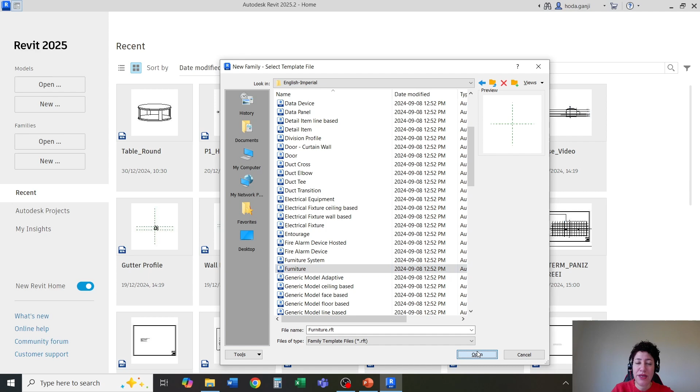Hit open. In order to create the four type options, I'm going to create a parameter for diameter and a parameter for height. Let's go with the first option, which is 42.5 for diameter, 16 inches, and these are the overall dimensions.

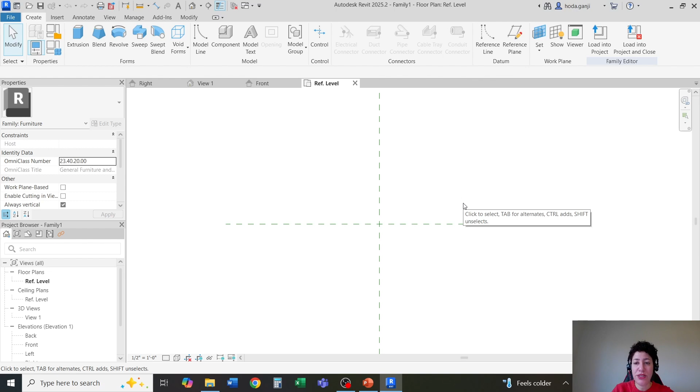So I'm going to go with the units, UN. I'm going to change the length to be in inches, and I'll go with 3 decimal places, and maybe I'll use the unit symbol for inches.

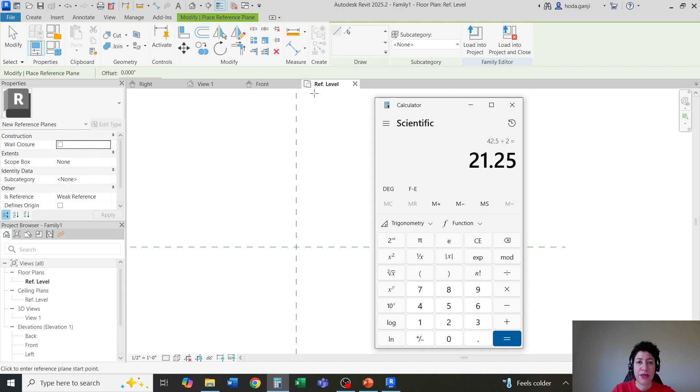OK and OK. I'm going to use a reference plane, type RP for reference plane. I'm going to put half of 42.5 on one side and the other half on the other side. So I'll go with 21.25 on one side, the other side, also for the other direction.

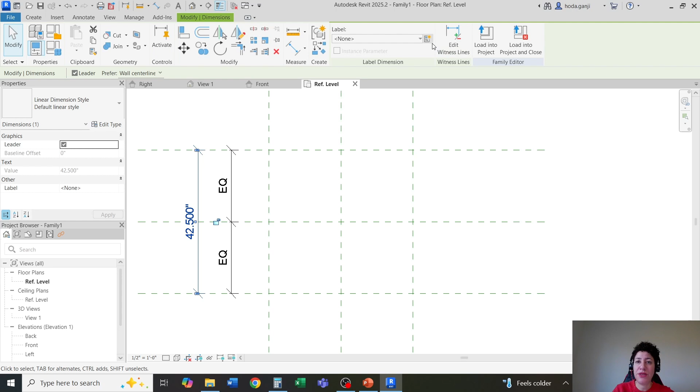I'm going to get the dimensions here, DI. This one is going to be equal. I'll get the overall dimension here, hit escape, select this, and this is what's going to be the diameter. So I'm going to create a parameter for this dimension, and I'm going to call it the diameter.

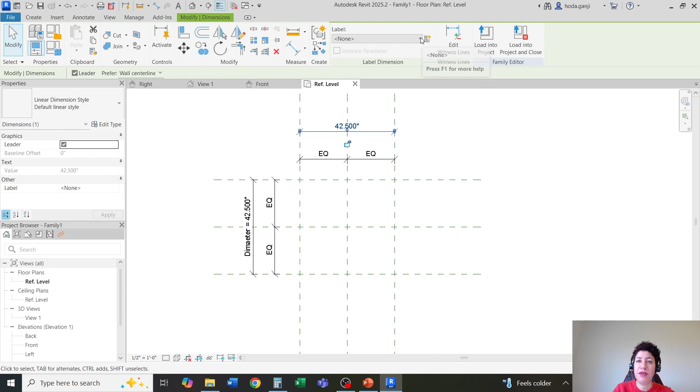As a type is good, OK. I'm going to type DI for dimension here, here, and here. It's going to be equal again. And the overall, when you get it, hit escape, select this from the label menu, go with diameter.

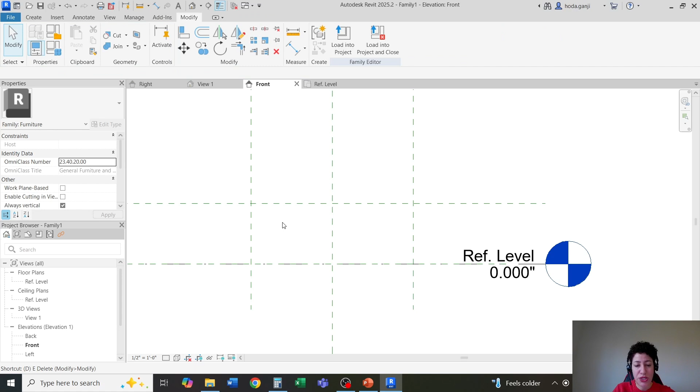There we go. On the front view, I'm going to create another reference plane, RP. Pick this line, offset by 16 inches. Up here, escape, DI dimension, and hit escape again, select this.

This one is going to be a new parameter. I'm going to call it the height, and OK.

Let's go back to the reference level. One little thing here, if you notice, is that the top shelf, the wood part, is a little bit inside because we're going to need some room for the legs. So I'm going to draw a circle extrusion, but I'm going to have 42 for diameter for the top shelf, so it's going to be 1/4 of an inch on each side for the thickness of the legs.

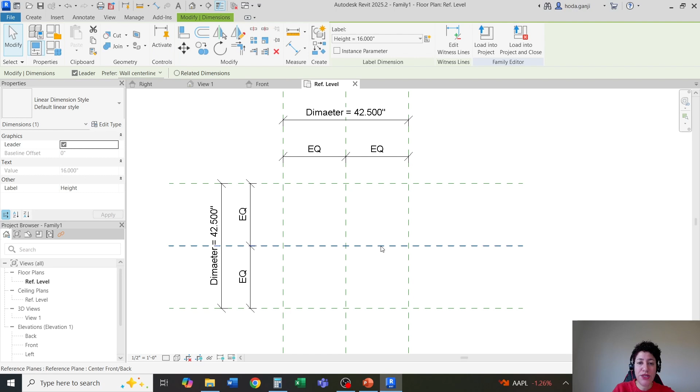So let's go back to Revit. I'm going to go to the front view. I'm going to select this reference plane, hit escape, go with create, set, pick a plane, pick this one, go to the reference level, and here I'm going to draw an extrusion.

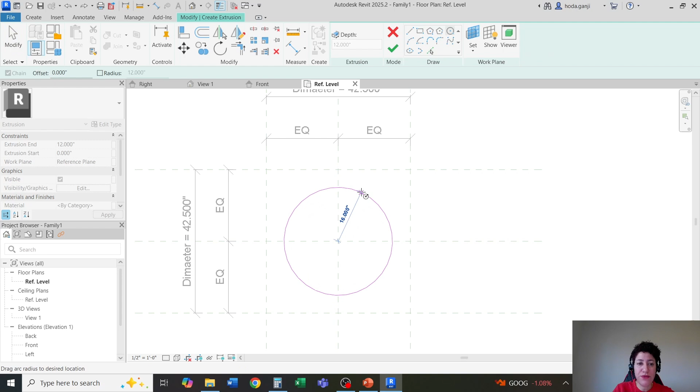Select the circle, one click here, 42 divided by 2 is going to be 21 in radius. So that 1/4 of an inch is going to be left over there for the thickness of the leg, but it's going to be always half an inch less than the diameter.

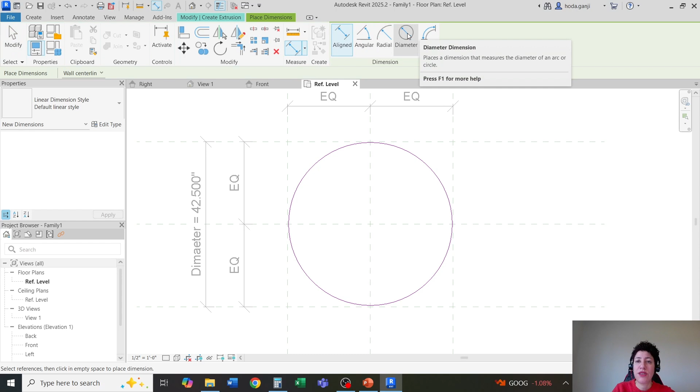So what I'm going to do is go with DI. I'm going to get this diameter dimension for this top circle, hit escape, select this, and this is also going to be a parameter, and I'm going to name it the diameter underscore shelf. Hit OK.

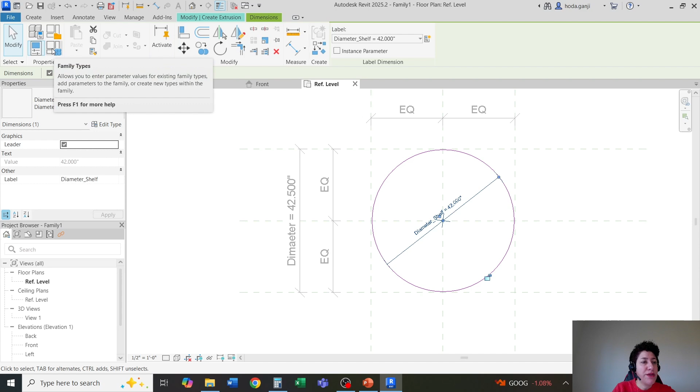Then I'm going to go to my family types, and I'm going to say for the diameter of the shelf, always go with diameter minus half an inch, 1/4 inches on each side. Hit OK.

Diameter, I might have a typo here. So first I need to get rid of this, go here. Click on it, go with edit. I'm going to type it again.

Okay, now that there is no typo, I'm going to type diameter, excuse me, diameter minus half an inch in here. Hit apply. Now it's all good.

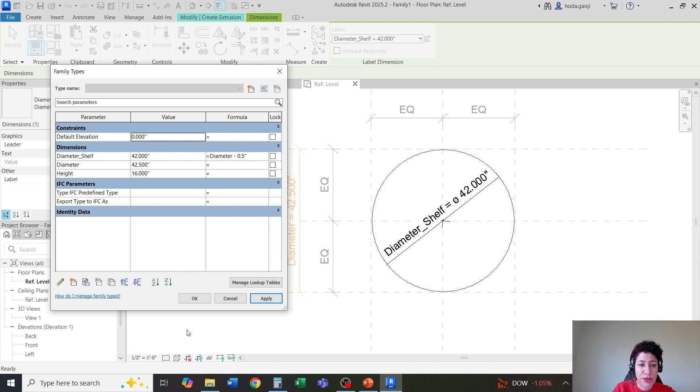Okay, and finish this extrusion. On the front side, we know that it's 1 inch going down, so for extrusion end, I'm going to go with -1.

Okay, now we can try our table. So I'm going to see if I go with, let's say 50 inches, this circle, the top shelf is responding. I'll go back, it's 42 and a half, it's all working okay, okay, okay, and okay.

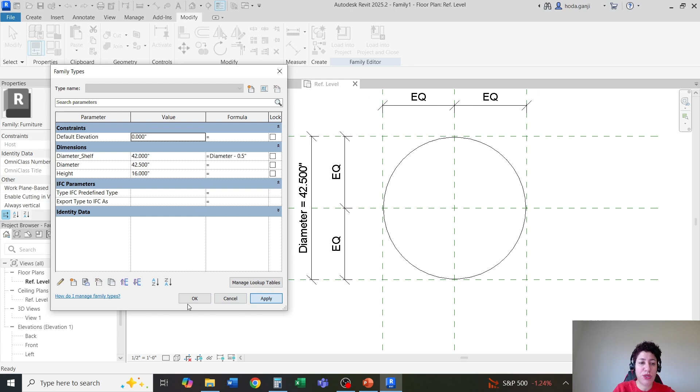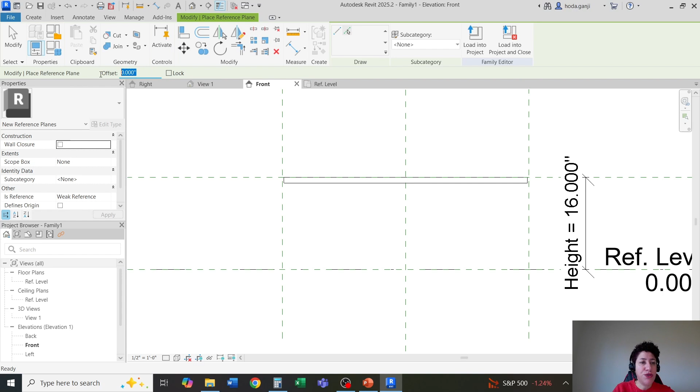To the front view, we also have 1 inch of the leg, the black part, then 1 inch above that, which is a second shelf. So I'll go here, I'm going to go with RP, reference plane, pick line, 1 inch for offset, and I'm going to offset 1 inch above here, hit DI, get this dimension and lock it.

So it's always going to be 1 inch locked to the bottom. And as you see, it's going to start from 1 inch going up by 1 inch.

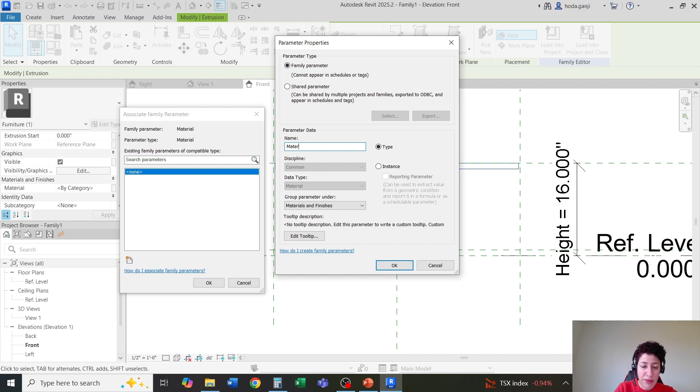Before going on, I'm going to select this. To the material, I'm going to assign a parameter. I'll click on Associate Family Parameter, click on New, and this is going to be material for the top, which is a wood. OK and OK.

Then I'm going to select this. I'm going to copy to clipboard, and paste to same place, so it's copied on itself. Now I'll go with edit work plane, pick a plane, I'll pick this one.

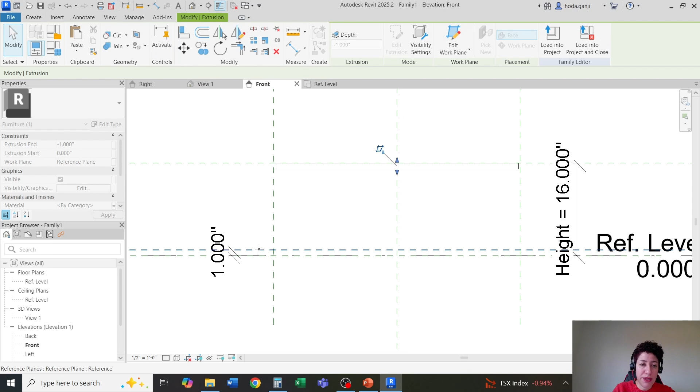So the copied one goes here, and the only difference is that the extrusion end is going to be +1 instead of -1. So these are the two shelves.

Feel free to try it. Try the parameter. So if I go here, I say go with 50, both of them respond, that's good. I'll go with 42 and a half. Also, if you change the height, the top one should respond, which it does. So it's all good so far.

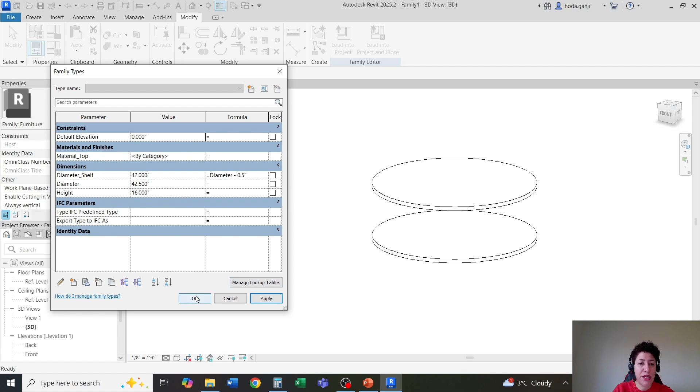Okay, I'll go to the front view. I'm going to close the ceiling plan so there would be no confusion. We always use the reference level for floor plan. I'm going to have front view here.

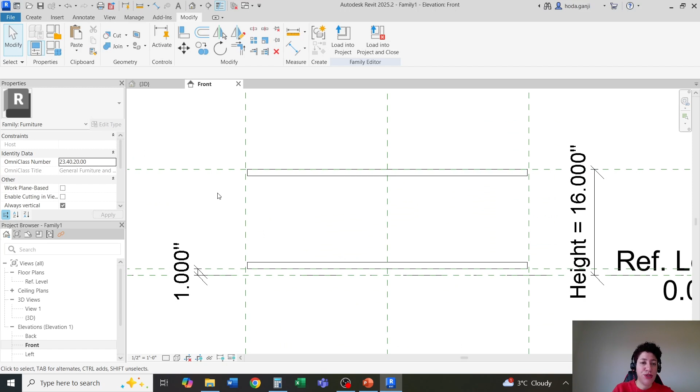Next, maybe I can create the leg at the bottom, and we're going to have one at the top too, a 1 inch offset from the top, from the height. So I need another reference plane here, RP. I'm going to offset it by 1 inch. One click here, hit escape, DI, get this dimension and lock it.

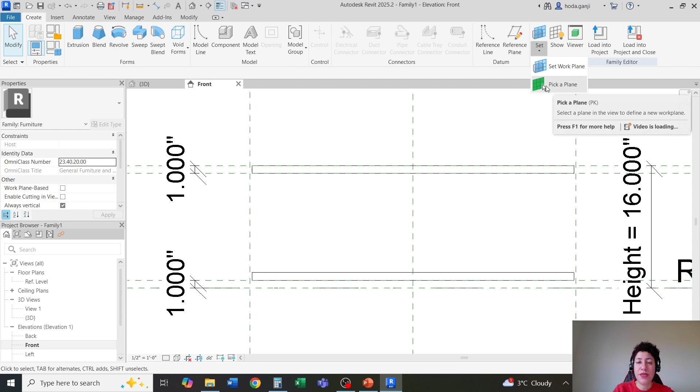Next, maybe I'll go to this reference plane and draw my circular supporting here. So I'm going to go with create, set, pick a plane. I'll pick this plane, I'll go to reference level. Another extrusion, this time it's going to go all the way to the outside here.

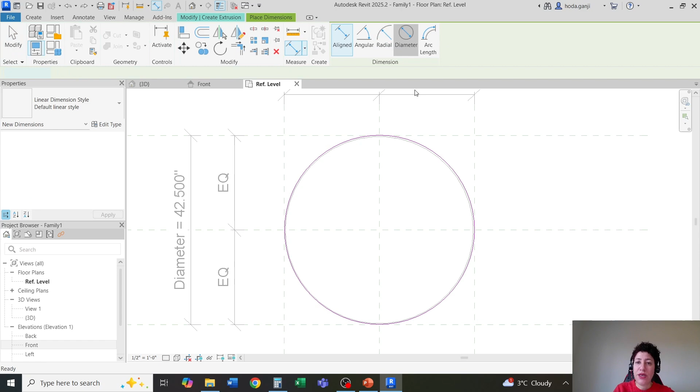Now, in order for this circle to respond to this diameter, I need to type DI, get this diameter, the one on the outside here. Hit escape, select this, and I'm going to say for this one, follow the diameter itself. Finish this. And now let's go here, click on it, and it's going to be -1 for the extrusion.

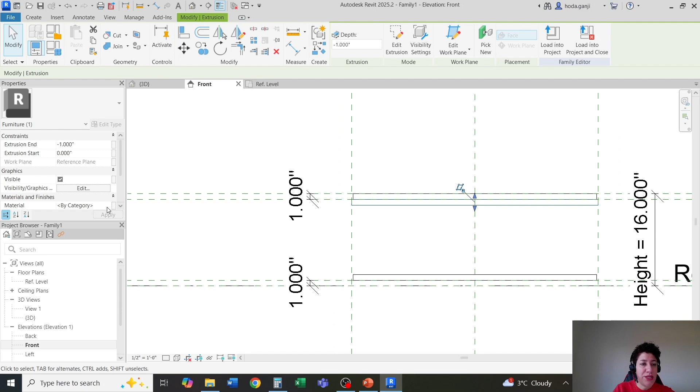To the material for this one, I'm going to go with associate family parameter. It's going to be a new parameter, which I'm going to call material for the leg and support. So now let's check it.

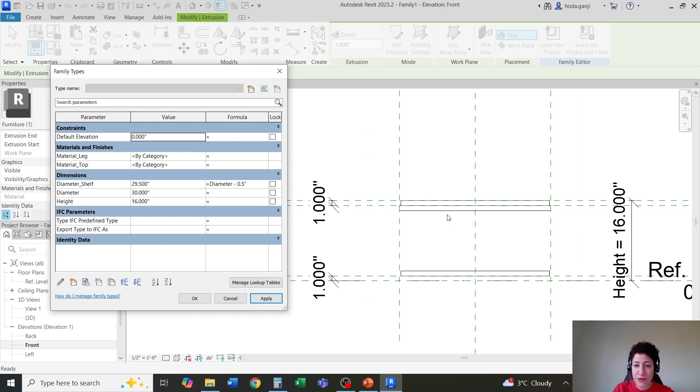If I change the diameter, let's say to 30, both of them respond, that's good. I'll go back to 42 and a half, apply and OK.

I'm going to select this one and copy, paste to the same place. Edit work plane, pick a plane. I'm going to move it down here and change extrusion end to 1. Hit apply. So far it seems all good.

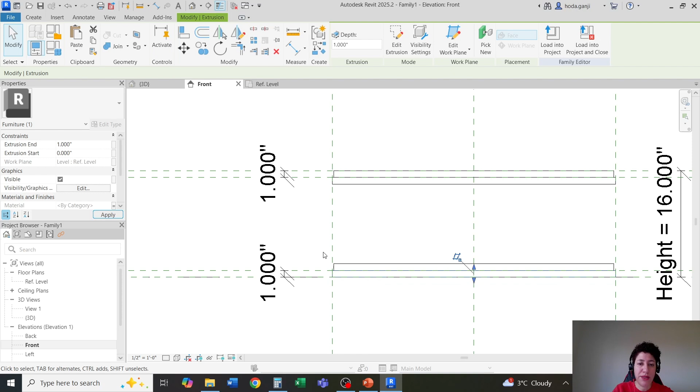We have the 4 circular parts. Next, I need to create the 4 legs. It's 4¼ of an inch by 12 inches. It's actually by 13 inches. I think it's a small mistake here. But it's actually aligned with the edge of the circle. It's not totally rectangular, right? So it's 4¼, right? So first thing I want to do here is on reference level.

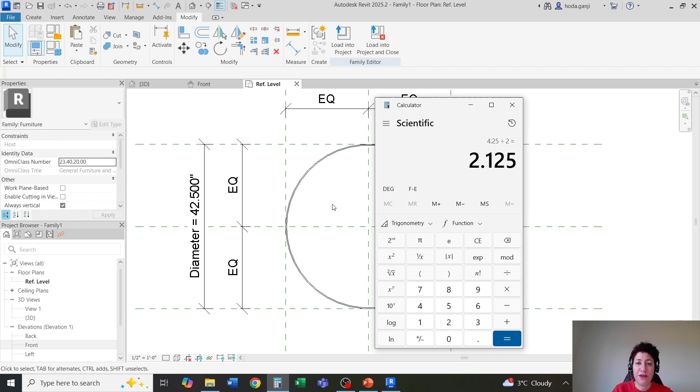4.25 by 2 is going to be 2.125. I'm going to go with reference planes offset by 2.125 from the center one to right and left, and right and left here, hit escape. Now get dimension, DI from here to here and here, it's going to be equal, and here to here it should be 4.25. That's good.

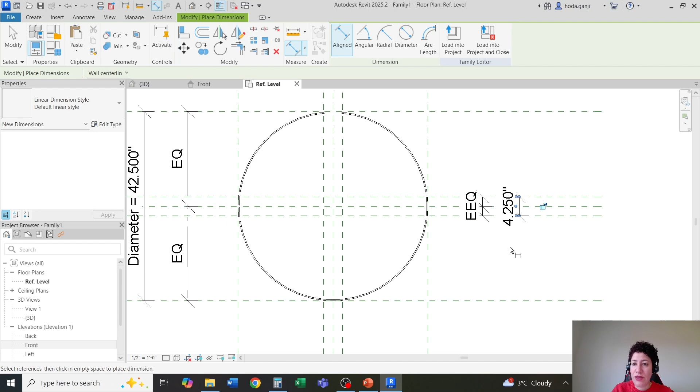Same here. Get the dimension, it's going to be equal dimension on this edge, and from here to here is 4.25, right? Now I'm going to go to front view.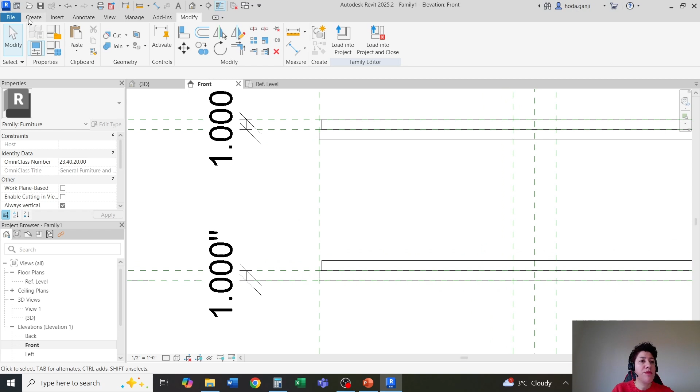The leg is going to start on this reference plane, 1 inch above the floor. So I'm going to go with create, set, pick a plane, pick this one, go to reference level. I'm going to go with an extrusion.

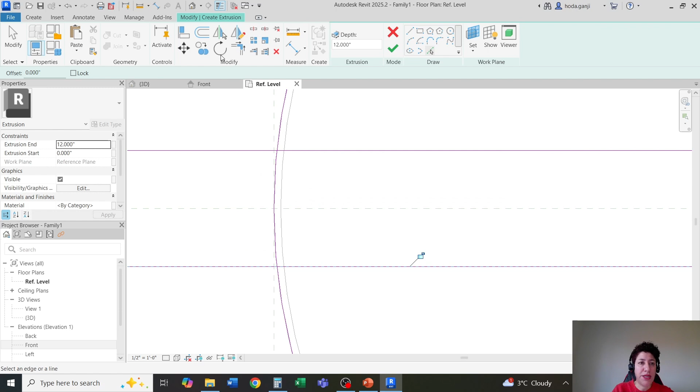Now I'm going to pick this line, lock it, this line, lock it, so it's going to be locked to the edge. I'm going to pick these two reference planes, and I'm going to trim this part, trim here, trim here. Then I want to pick this line, lock it, this line, lock it, and trim here and here. Okay, I'm going to finish this.

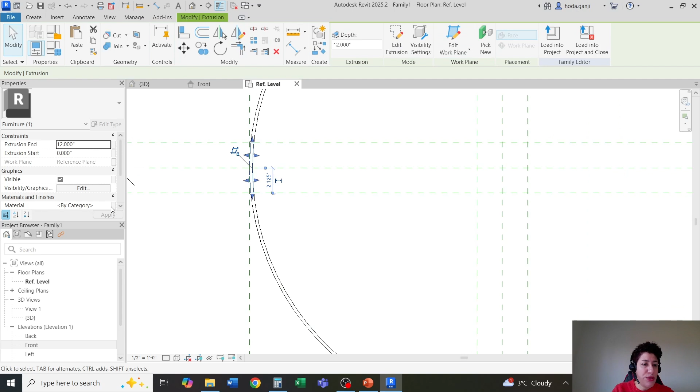To the material, I can go with associate family parameter, select the material of the leg that we already created, hit OK. On the front view, I'm going to move this up and lock it to the bottom of the top circular part, like this. Okay, now if I look at it...

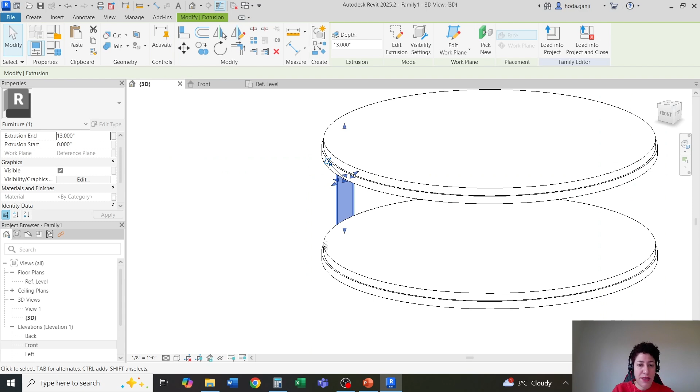If I go here and change, let's say the diameter to 28 inches, it's gonna follow, it's all good. I'll go with 42.5.

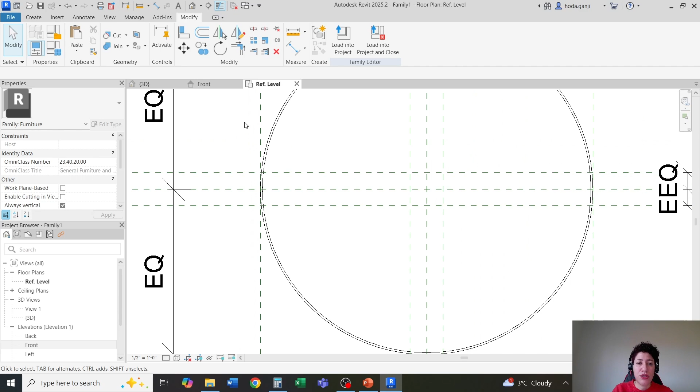Last thing I need to do is to have this leg on the other three sides. So I'm gonna go here, select that leg, go with edit extrusion, select this extrusion, and say mirror. It's gonna be mirrored on that side.

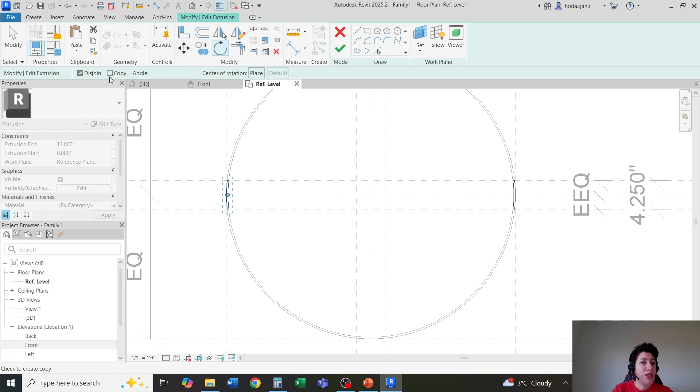I want to select it again and say copy or rotate, and where you are rotating, also copy that. I'm going to place the center here, rotate by 90 degrees. Finally hit escape, select this and mirror on this other side.

Finish this extrusion. I'm gonna look at it on this view. Now, if I go with a different diameter, let's say 30, it all follows, that's good. And it's gonna keep being 4.25 on the width for the leg, that's good. I'll go with 42.5 here, apply and OK.

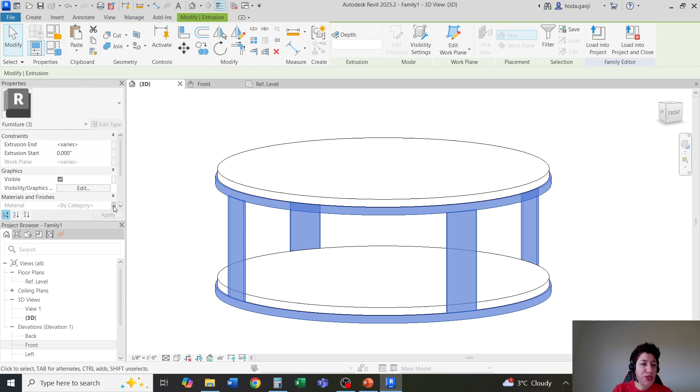So it's all nice and good now. See that we have only two materials: one material for these three objects, which is the material of the leg, and one material for these two, which is the material for the top or for the shelf.

Next thing I need to do is create four type options. The first one is 42.5 by 16. So I'm going to go here and go with new type. I'm going to call it 42.5 by 16. It's 42.5 by 16, that's good. Apply it. I'll go with a new one.

Second type is going to be 30 inches by 16. It's a bit smaller, so 30 by 16. I'm going to put the diameter on 30. That remains 16 for the height. Apply, OK. I'll go back to my family types.

So far I have two options. I'm going to create a third one, which is smaller and higher, like in the corner between the sofas. It's going to be 24 by 24. Diameter is 24, height is also 24. Hit apply.

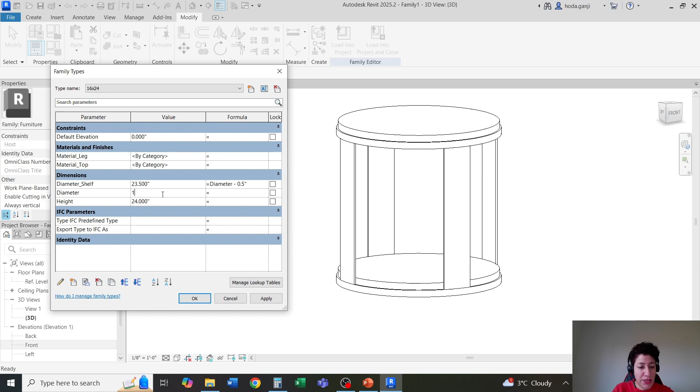This another one, hit apply. A new type, and this last one is going to be 12 actually. Maybe we'll go with 16, 12 is too small. 16 by 24. I'm going to type 16 by 24. Diameter is going to be 16. Height is remaining 24. Apply and OK.

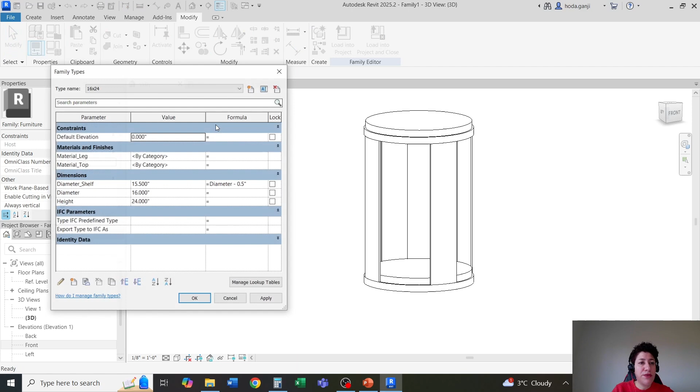So this is my type 1. This is my type 2. This is my type 3. And this is my type 4, all in one family. I'll go with type 1, that's the main one in this case.

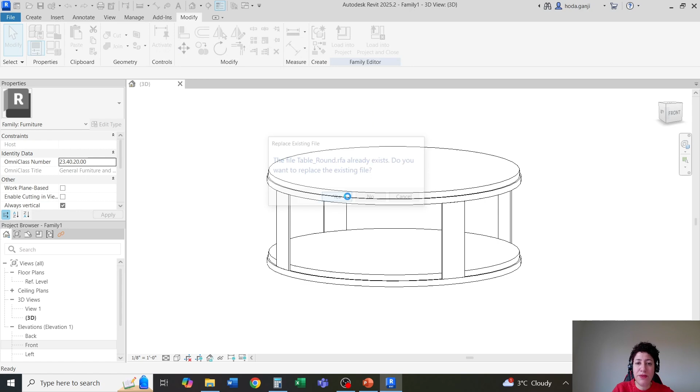Now I'm going to save this family and load it into the project, and I'll show you how to assign material. So save the family. I'm going to name this round table. One option, I'll go with one option as backup. Save it, I'll replace it with what I have. Then I'm going to open a new project.

So I'll go with new model. It doesn't matter if this project is metric or imperial. I might go with metric, open, OK. The units don't matter. I'm going to load this into the project and close.

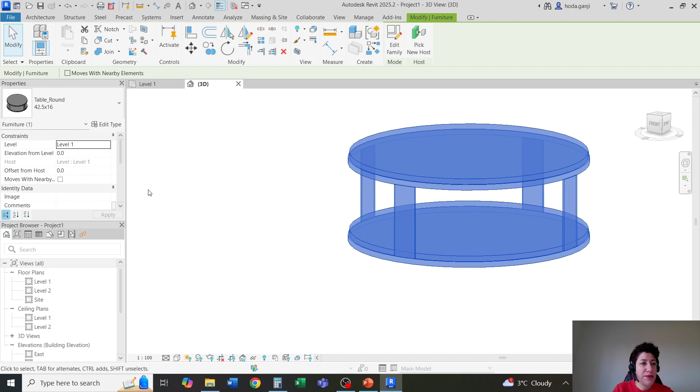Put one of them here. Let's look at it here. And this one is a round table. If I go here, you see all the options are here, right? So maybe I'll have this one.

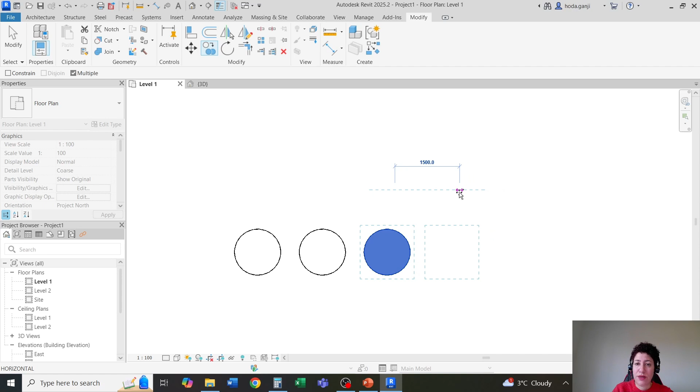I'm going to copy this four times here: 1, 2, 3, and 4. First one is going to be type 1. Second one, I'll put it on type 2, type 3, and type 4, just so we see. Type 4.

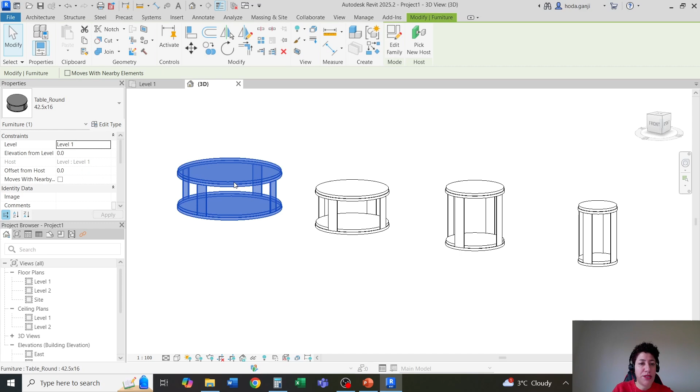There we go. So now one last thing I want to do is assign material. I'm going to click on this one, edit. I'm going to click here to assign a material. I'm going to create a new material, rename it. This is going to be called Biscotti Wood.

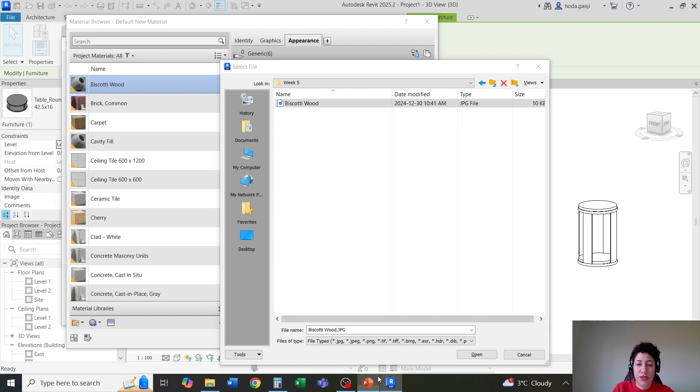On the appearance, I'm going to go with an image, and this is the wood panel that you see here. I'm going to select it. Under graphics, I'll say go with using the render appearance, so it's going to have more or less the same color. Feel free to go with edit image here.

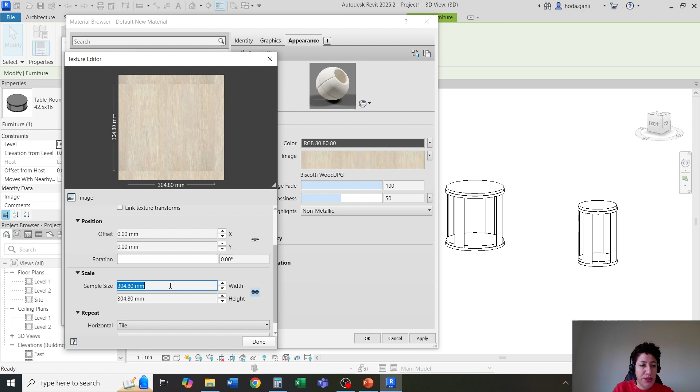You can set the sample size that I have, which is 1 foot by 1 foot, or you can set the sample to 2 foot by 2 foot. Done, OK and OK. I'm going to put this on realistic. Now you see it applied it on this one. I actually need to go one by one.

And now that I have the material, I can just go ahead and assign it. Next one, assign the same material.

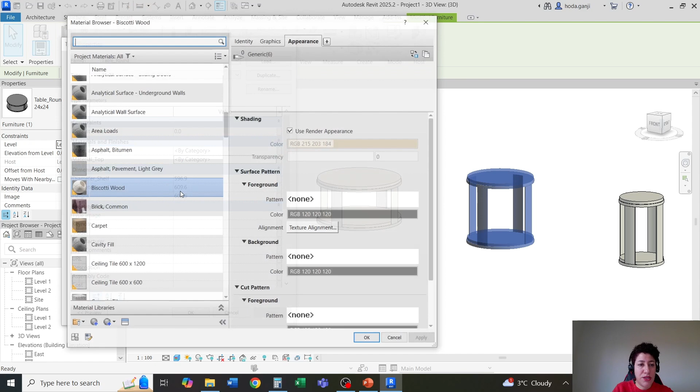And the last one, assign the same material. OK and OK.

Now select this and go to the type for the material of the leg. I'm going to create a new material. I'm going to name it table leg.

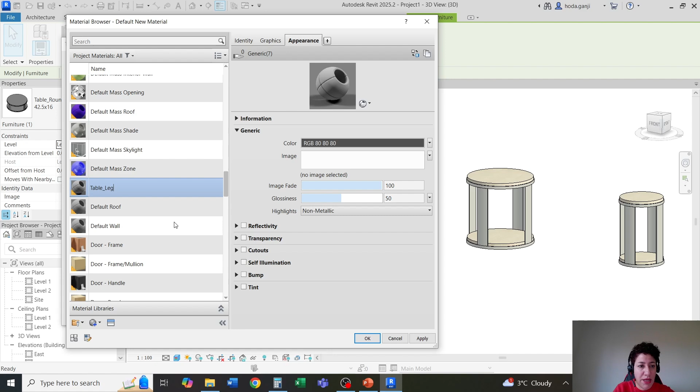Under appearance, this time I'm just going to assign a color. But what color is it? Let me show a trick. If you don't know a color of something, go with insert in PowerPoint. If you don't have Photoshop, you can just draw any image here. For the shape fill, I'm going to go with eyedropper and click here somewhere.

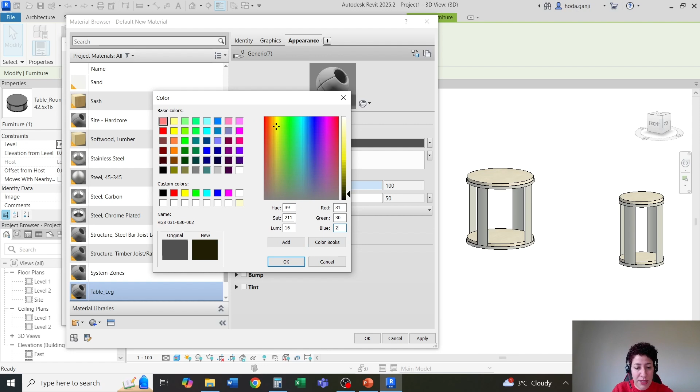Again, I use this option. Now that I have it, I'll go with eyedropper and click somewhere on the leg. I'll go with shape fill, more fill colors, and it's 31, 30, 28 for RGB. So I'll go here for the color, I'll go with 31, 30, 28, and you get the exact same color. Hit OK. For graphic again, I'll go with use same color, which is 31, 30, 28. Hit OK, hit OK. I can assign material of the leg to this one.

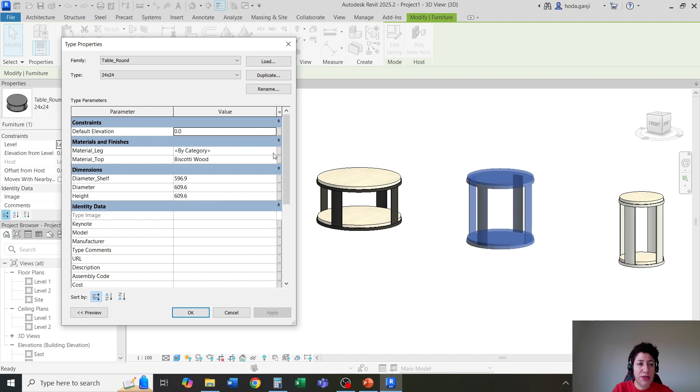I can assign material of the leg to this one too, and finally to this one.

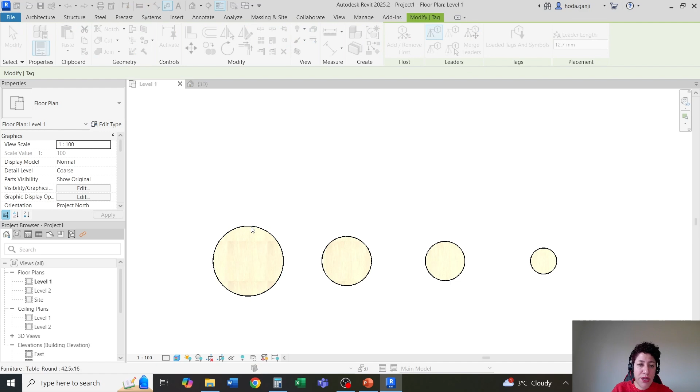Okay, now if I see this on level 1, you can also put it on realistic here if you want. I can also tag them, so I'm going to go with annotate, tag by category, tag this one. I'm going to need a tag for furniture, yes.

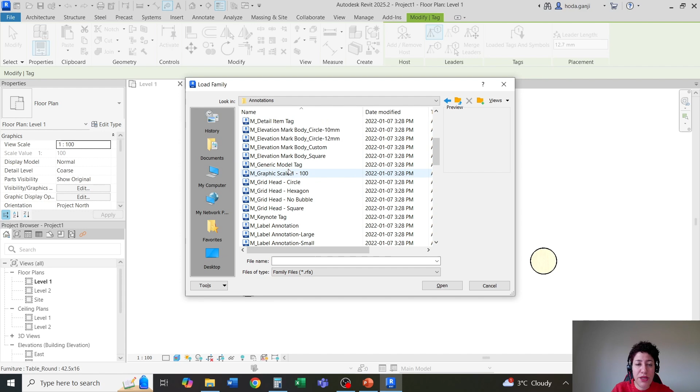The tags are always under annotations, so I'm going to go with annotations. I'll go one step back. I'll go with English US annotations. It's going to be a furniture tag. If you don't find it here, go to the architectural menu and metric furniture tag. OK.

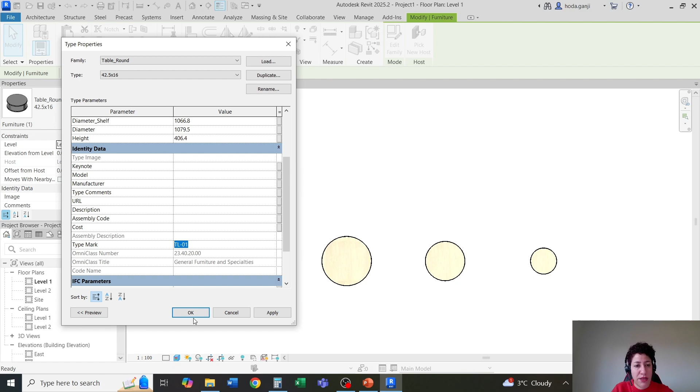One click here. And what is the tag reading? It's basically reading the edit type. So I'm going to go here and let's say I'll go with type mark. I'm going to call this maybe TL01, table number 1. Feel free to select this tag, edit family.

Sometimes I would like to maybe put these lines as invisible, load into project and override so I don't see the line. I'm gonna go with tag again. TG is for tag. I'll tag this one, and this one.

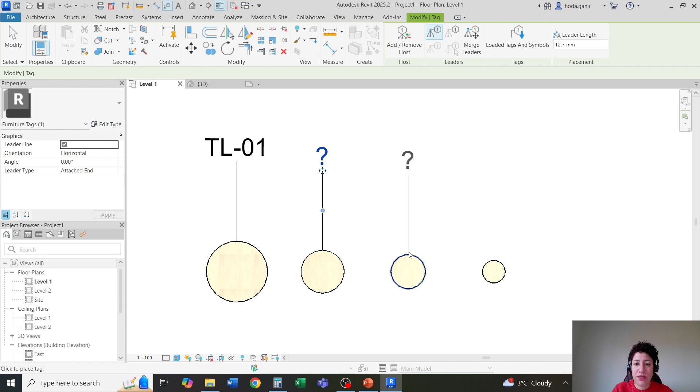Again, what is it reading here in the tag? It's reading the type mark. You can change it to mark if you want. What's the difference here? Mark is the value here.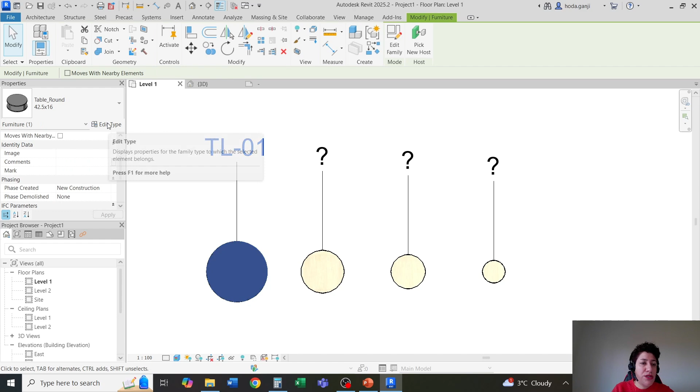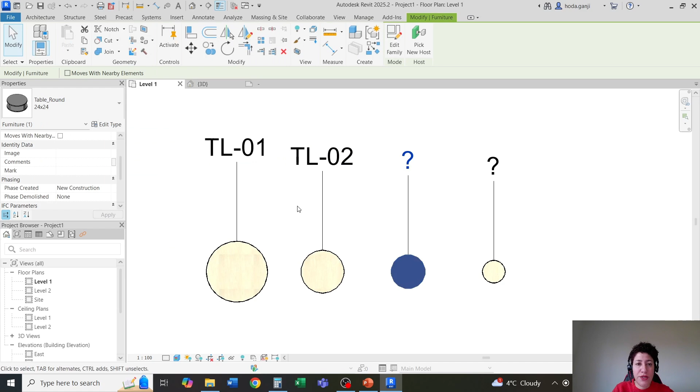Type mark is under edit type here. So I'm gonna go with this one being TL02, this one to be TL03, and this one under edit type I'm gonna assign TL04. See that if I assign the same thing, it's gonna show a message, so I'll have to go with a different one.

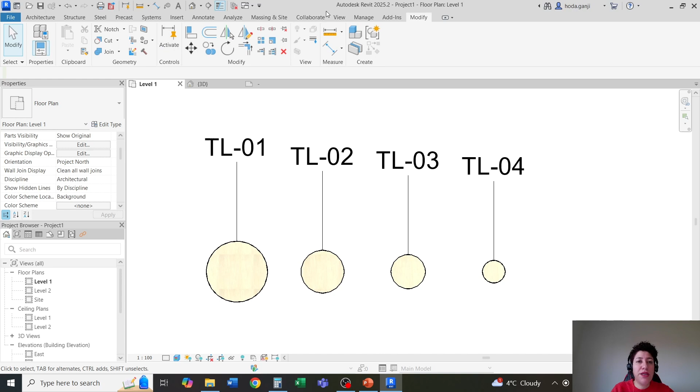Okay, now if I get a furniture schedule, like if I go here, schedule and quantities for furniture, I'm gonna say, tell me how many I have, tell me maybe on which level they are, what's their type, and what's their type mark. That sounds good, hit OK.

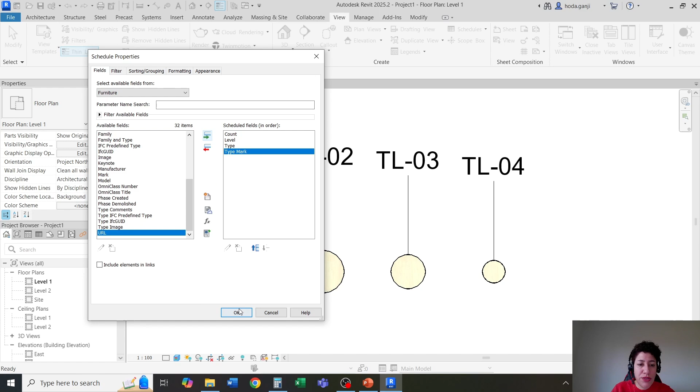I'm gonna make this a bit larger. So I have these 4 types, one of each in this project, and it's all showing OK here. Now if I had 2 of one of these, let's say 2 of this one here on the schedule, you're gonna see that it's itemizing them.

So if I go to sorting grouping, if I say don't itemize, now it's going to put all of them in one row. I'll go back with sorting grouping and I'm going to say sort them by type here. Hit OK. Now you see I have 2 of this type and 1 each for the other types, right?

I can also say after type mark, I'll go with ascending here. So it's going to go 1, 2, 3, 4. So I have 2 of this one and 1 for each of the other types.

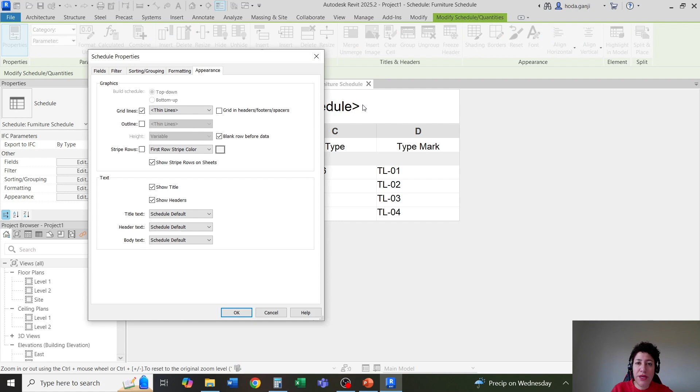Sometimes I would like to go with appearance. I want to remove the blank row before data, and I'm going to go with stripe rows. Hit OK. Now it looks a bit nicer.